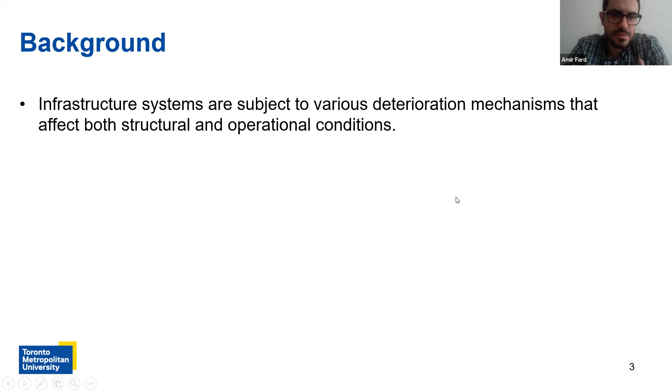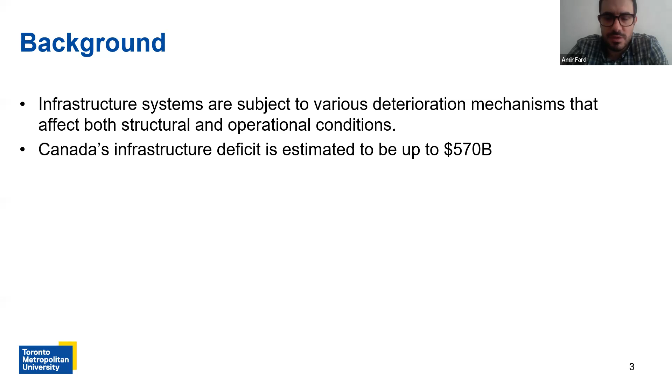Infrastructure systems are subject to various deterioration mechanisms that affect both structural and operational conditions. Canada's infrastructure deficit is estimated to be up to $570 billion. Based on the Canadian Infrastructure Report, the last version of which is 2019, 30% of water mains and sewers are in fair or worse condition, and the situation is also not good for roads and bridges: 40% of them are in fair or worse condition.

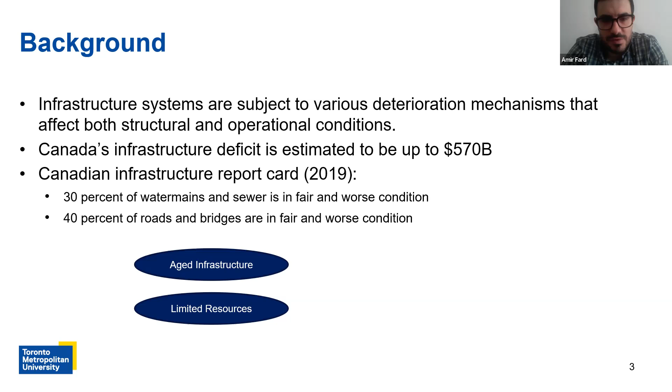So considering the situation of infrastructure and the limited resources to address the aging issue, we see that we need to optimize life cycle management policy to take better advantage of our resources.

The motivation of this study is the network sequential decision-making challenges. For sequential decision-making, especially for larger scale networks, the formulation and computation cost is one of the main challenges. For most cases, we cannot formulate the problem in a linear setting to take advantage of linear programming. And heuristic or evolutionary algorithms such as genetic algorithm cannot help much because they are case specific and they may also have convergence issues.

The motivation is one of our projects, to optimize the sewer network flushing program for a municipality in Ontario, Canada. On the right-hand side, you can see the sewer network. It consists of almost 2,000 sewer segments and 21 catchments. Each catchment consists of many sewer segments. Here you can see the sewer catchments, a catchment being a sewershed, in different colors, and each catchment consists of, on average, about 100 segments.

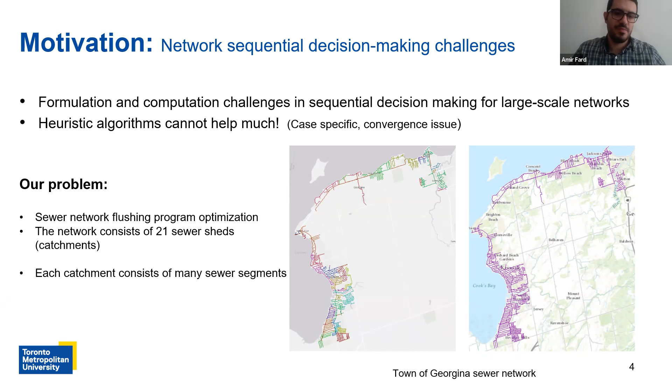So we can formulate our problem. Here you can see different years. Each year is a decision step. For example, for 7 years, we have 7 decision steps. And at each stage, we need to decide which catchments should be flushed that year.

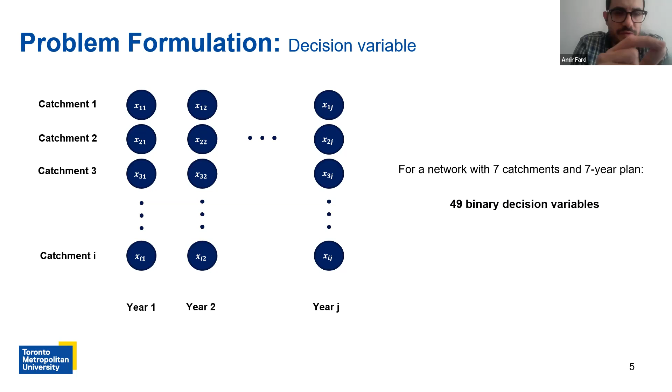In this study, I consider a toy example with 7 catchments and 7 years. It means we have 49 binary decision variables for this problem. Each xij is a binary decision variable: 0 means we do not flush that catchment, and 1 means we flush that catchment for that specific year.

We model the problem as a Markov decision process. The condition of each sewer segment is defined as a 5-scale rating based on NASSCO PACP rating, where 5 is the worst condition that needs replacement, and 1 is the excellent condition. So the deterioration mechanism can be modeled as a Markov process.

On the left-hand side, you can see the transition matrix for natural deterioration, and M is the maintenance effectiveness matrix. For example, you can see for the first catchment the transition probability matrix that represents natural deterioration. Here we consider perfect maintenance, which means whatever the state of the catchment, after flushing it goes to the excellent state.

This assumption won't affect the performance of the algorithm, because it's just a transition matrix. We can consider any maintenance effectiveness matrix, but because of a lack of data, we consider perfect maintenance here.

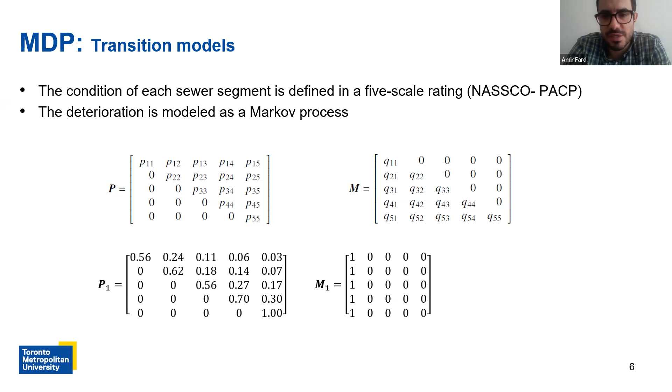The goal of this optimization is to minimize the overall average condition of the sewer network for the whole planning horizon. It means we need to minimize the performance of each catchment. Actually, it is a weighted average, and the weights are the length of the catchments over the 7 years. Li is the length of the catchment, H is the planning horizon, N is the number of catchments, and mu ij is the overall condition of catchment i at the end of year j.

Here you can see the mu ij, which is the performance or the overall condition, is the expectation of a state vector of the catchment after action i for catchment i at year j when we apply the action. So we can define the state vector based on the action and also the state vector from the previous year. As you can see, the overall condition for each catchment at a specific year is a function of transition matrices and also the decisions made in the previous years.

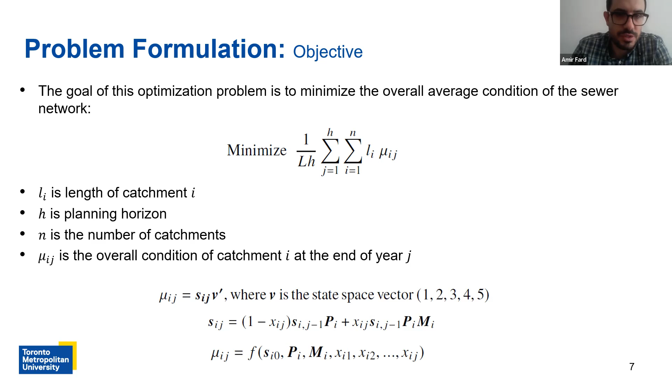The next constraint is that all catchments must be flushed at least once in this program to make sure that the whole network will be covered during this program.

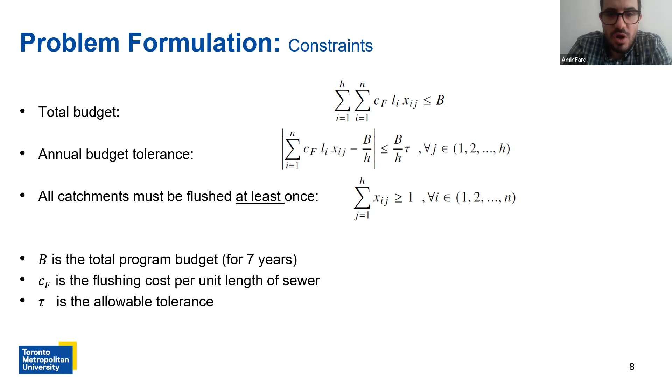Since our problem is a Markov decision process, I consider using a reinforcement learning approach to solve this MDP. In a reinforcement learning setting, we have an agent that makes actions in the environment. And after each action or decision, the environment transitions the agent to the next state and also gives the agent a reward as a function of the state and the action which has been taken.

In a reinforcement learning setting, the goal is to maximize the total cumulative discounted reward, or the negative of cost, which is equivalent to minimizing the cumulative cost. Here, gamma is the discount factor and R is the reward of each action in a specific state. And here, GT is the total cumulative reward during this program.

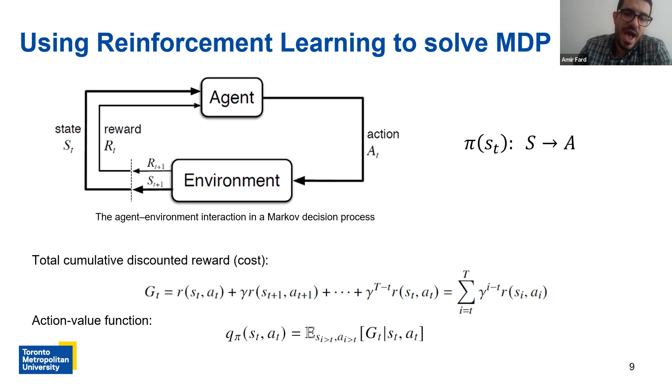There is an important concept here, which is the action value function. The action value function means how good it is to take a specific action at in a given state. It is the expectation of future reward after taking a specific action in a specific state.

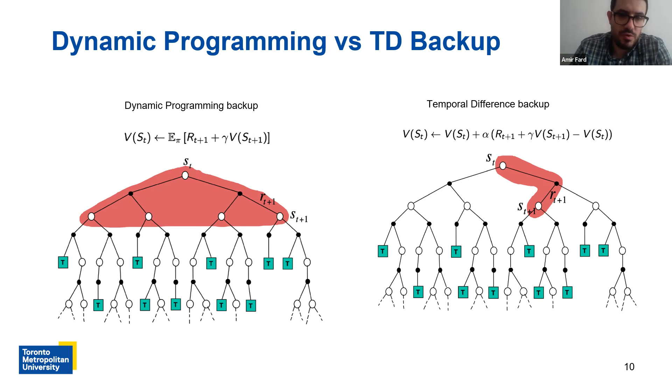The foundation of reinforcement learning is dynamic programming. However, in dynamic programming, if we want to estimate the value of a state, we need to take the expectation over all possible future states for the next stage. But many reinforcement learning algorithms use temporal difference backup. It means you make estimations gradually by interacting with the environment, just one step forward: after making a decision, you see the next state and the reward, and based on that reward, you gradually learn the value function of the states or the action value function of the policy.

Here I use a Q-learning algorithm. In the Q-learning algorithm, first we initialize all the Q values, and then we start interacting with the environment within a specific number of training episodes. For example, here I use 50,000 training episodes, and each episode is a simulation from the first year to the last year.

We consider epsilon greedy policy; I'll explain it later. And when we interact in the environment, for a specific state, we take action based on the policy, and then we see what is the reward and what is the next state. And based on that, we update our estimation about the Q values for that specific state and action.

And here, epsilon greedy means at each stage, with epsilon probability, we take random action, and with 1 minus epsilon, we use our previously learned policy. Actually, this is because here we have an exploration-exploitation dilemma. To address this, we use epsilon greedy policy, and as we go through the learning, we decrease the epsilon. It means gradually we take advantage more of the learned policy to reinforce it.

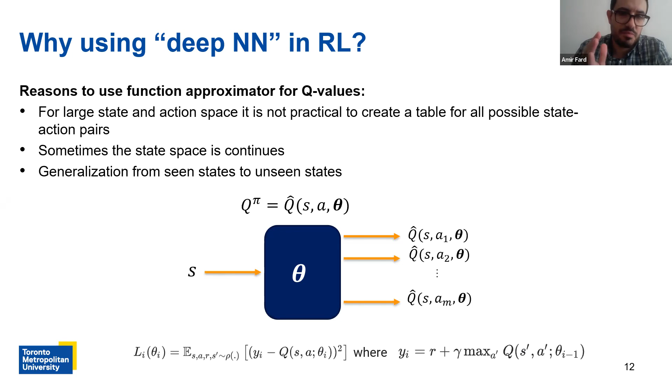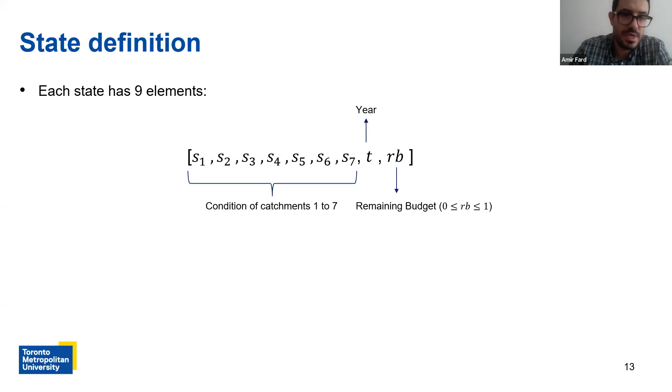For this problem, the state vector is defined as 9 elements. The first 7 elements are the conditions of the catchments, real values from 1 to 5. The 8th element is the year, and the last one is the remaining budget, which is the proportion of budget from 0 to 1. The reward is defined as 5 minus the overall condition of the network after applying the action based on the transition matrices. And also I added a negative value to the last step reward if the total cost exceeds the total budget.

And we can deal with the annual budget in 2 ways. As a naive assumption, if the annual budget is out of the specified tolerance, we can add a penalty to the rewards. The next option is we reduce the action space, because for this example, we have 7 catchments. It means 2 to the power of 7, we have 128 actions in the action space, but based on the annual budget tolerance, 14 of them are feasible actions that won't violate the annual budget constraint.

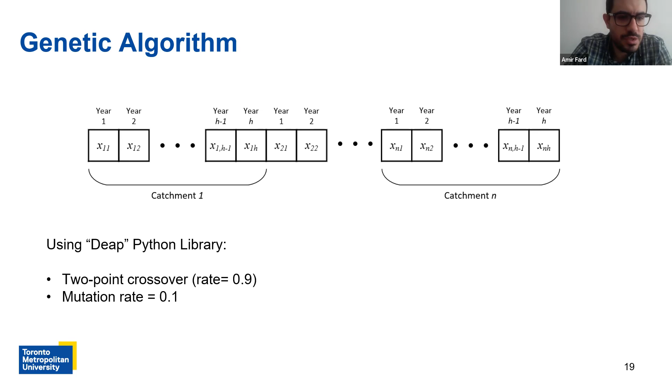And the worst one is for multi-agent deep reinforcement learning, because there is a challenge to define how the agents cooperate together to reach the solution. It needs hyperparameter adjustments. It needs more work to reach a good solution.

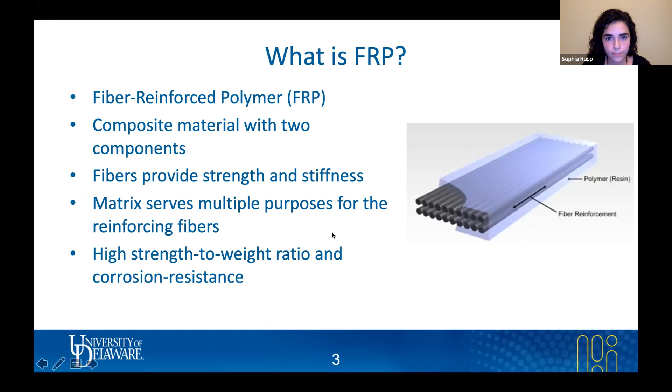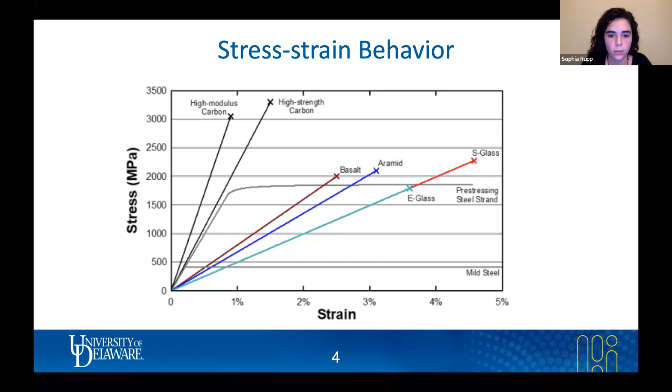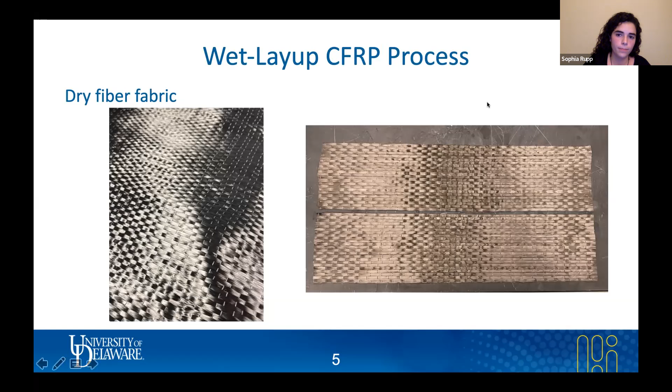There are a few different methods that can be used to fabricate CFRP. The method that I'm specifically using in my research is known as wet layup, or to put it in simpler terms, it's just fabricating the CFRP using your hands. And the way you start this process to strengthen a concrete member is to first cut your dry fibers out, depending on how much you need. And then you can mix your neat epoxy and your putty epoxy. Neat epoxy consists of two components, a part A and a part B that need to be proportioned and then mixed together. And then putty epoxy, also known as thickened epoxy, consists of the neat epoxy mixed with silica fume.

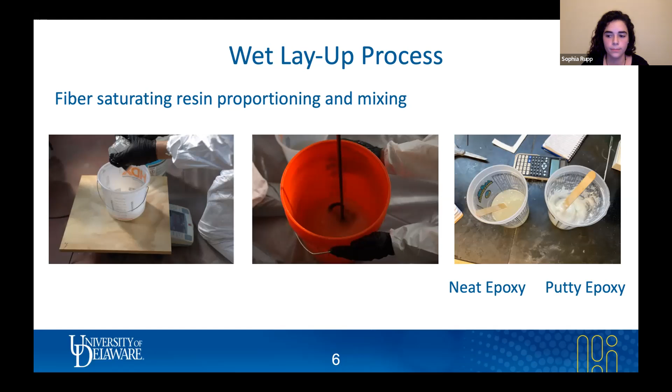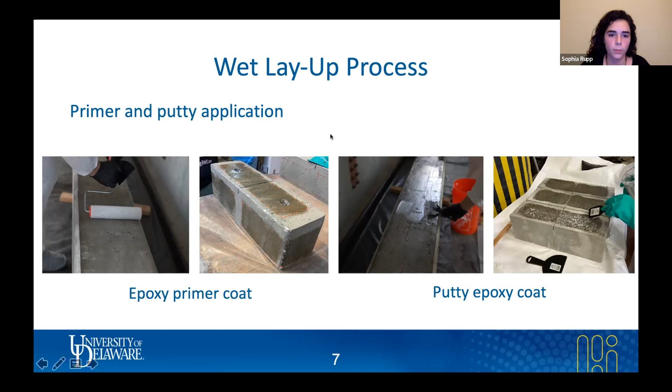After you have those components mixed, you can then prepare your surface for applying the CFRP. This consists of applying an initial epoxy primer coat onto the surface. And then on top of that, you apply that thickened epoxy or putty epoxy. What this does is it fills the voids and the pores in the concrete to ensure a good bond between the CFRP and the concrete. And then comes the actual saturation of the fibers to make it a composite material and apply to the concrete surface. This is typically done with a wet layup process of just pouring the mixed epoxy onto the dry fibers and using a tool to make sure that the epoxy has fully saturated each and every fiber.

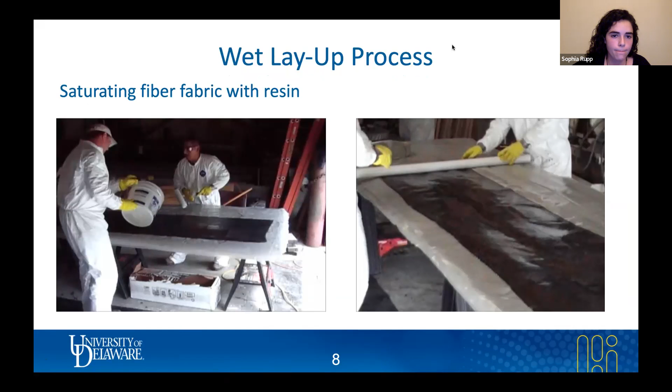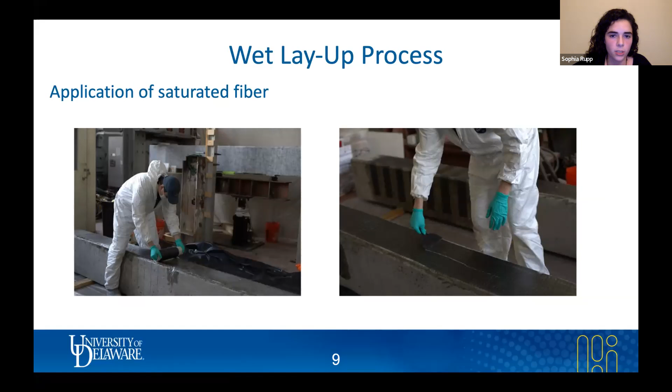Next is to then take your saturated fibers and apply it to your concrete surface, and typically take a putty knife, drag it over the saturated fibers to make sure that there's no air trapped underneath the saturated fibers or in between the concrete surface and the fibers. And then you let this sit and cure for about 72 hours, and the saturated fibers will then cure and become a composite material, leaving you with a strengthened member.

Despite all of the great properties of CFRP that I previously mentioned, there has been prior research done that has shown when CFRP is exposed to water in the field, it will lose adhesion between the CFRP and the concrete. When a strengthened member is subject to flexure and it's dry, we typically will observe a cohesive debonding failure, which indicates that there is good bonding between the CFRP and concrete. However, when it's wet, we will experience an adhesive debonding failure, which indicates that there's poor bonding between the CFRP and concrete, and the CFRP essentially peels away from the concrete.

Debonding is a very typical failure mode that we see when a strengthened beam is subject to flexure, and it's very undesirable because it happens way before the CFRP can reach full potential and full use out of its properties. So the fact that water exposure can induce this failure mode makes it very important to research ways to improve the bond durability between CFRP and concrete after it's been exposed to water.

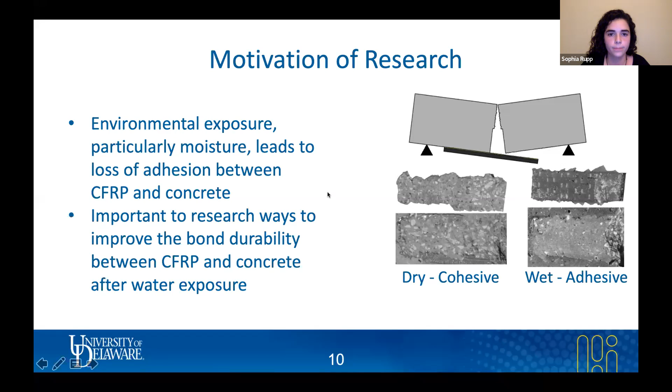And for that reason, I am specifically researching how carbon fiber splay anchors can be used to improve the CFRP and concrete bond after it's been exposed to water. And not only will I be researching the effects of water exposure on a concrete strengthened beam, but also the individual constituents that are strengthening the beam, such as the CFRP alone, the putty epoxy that I mentioned, and the neat epoxy that I mentioned earlier.

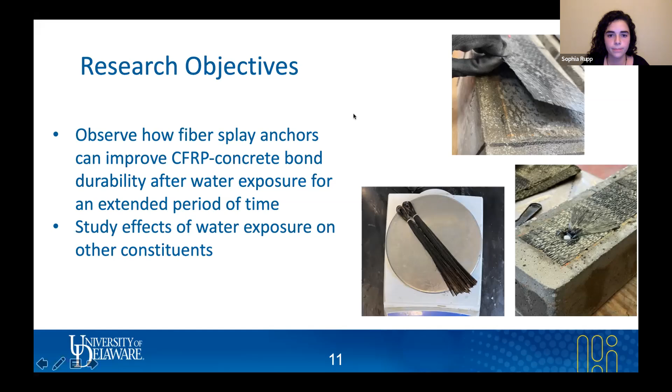ACI 440.9R provides accelerated conditioning protocols, or ACP for short, that provide guidelines on how you can replicate long-term water exposure to a concrete strengthened beam. And the two main guidelines to take away from this are that the concrete strengthened beams need to be exposed in water for 3,000 hours, and the water that they're immersed in has to be around a temperature of 122 degrees Fahrenheit.

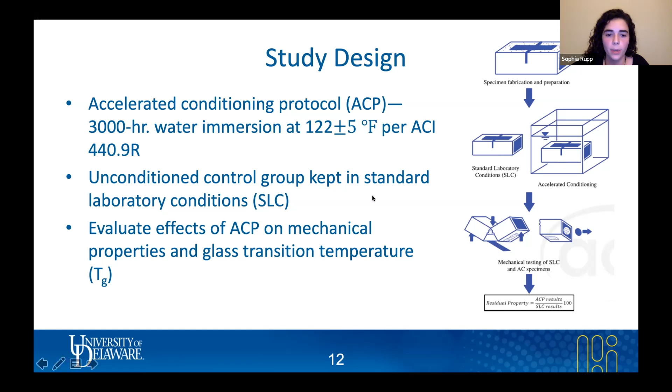And in order to study the strength retention of these beams that have been exposed to water, we also have to have a duplicated group that is unconditioned, or is kept in standard laboratory conditions, or SLC for short. And not only will we be immersing the concrete strengthened beams in the water, but we will also be immersing the constituents that make up the strengthened beam to evaluate the effects of ACP on those materials as well.

We will be measuring the strength of both the SLC and the ACP groups by doing a 3-point bending test. The beams that I casted so far are 6 inches high by 6 inches wide by 20 inches long. And when they are applied to the 3-point bending test, they will have a clear span of 18 inches. There will be a point load applied on the compression face of the beam at midspan. And on top of this, there's also a notch introduced at the tension face at the center line, so that we can control crack initiation.

From this test, we will be able to collect information about load versus deflection. And on top of that, we will be able to collect strain data from the CFRP. The strain gauge will be applied on the CFRP sheet, and it will be applied over that crack that's introduced.

There will also be dynamic mechanical analysis tests completed, or DMA for short, in which we will apply a cyclic load to the sample that's being tested, which in this case will be the neat epoxy and the putty epoxy. The cyclic load is applied as the temperature is increased, so that we can characterize the glass transition temperature of the samples, or Tg for short. The glass transition temperature is a characterization of when the sample goes from a glass-like state to a plastic or rubbery state. And the reason that this is important information to have is so that we know the upper service limit temperature of the material.

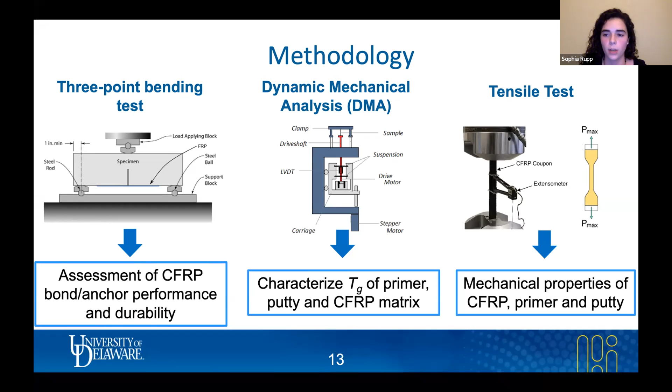And then lastly, we will also be conducting tensile tests on the CFRP samples, as well as the putty epoxy and the neat epoxy, to gain information about those mechanical properties. There are a few different variables that I'll be looking at changing and varying throughout my test specimens. The first is the anchor diameter that we're using for strengthening.

We are looking at using a 1/4 inch, a 3/8 of an inch, and a 1/2 inch diameter anchor. On top of this, we will also be varying whether the CFRP is bonded to the beam or if it's unbonded to the beam. To give a little bit of a better description on that, a bonded beam will include direct bond between the CFRP and concrete, whereas the unbonded beam will have what is referred to as a bond breaker between the CFRP and the concrete. In my case, I'm using a very thin layer of Teflon tape,

and this is so that we can study the anchor capacity alone. And then the last variable that we're looking at is whether or not we include that layer of putty over top of that initial epoxy coat. The reason for that is to see just how effective the use of that putty is in increasing the bond durability or increasing the bond between CFRP and concrete.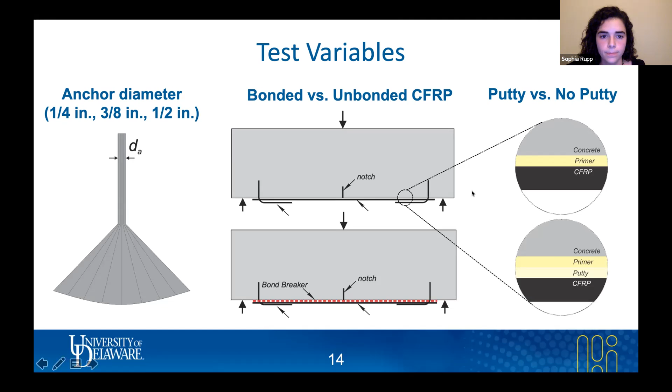Before I could actually get into the strengthening of the concrete beams, there were a few steps that I had to take in order to prepare the beam for strengthening. As you can imagine, for the beams that had anchors installed, I had to drill holes into the beams. And not only that, but I also had to chamfer those holes to avoid stress concentrations when the fiber splay anchor was bent over that corner. And for the same purposes, I also had to chamfer the corners of the beams.

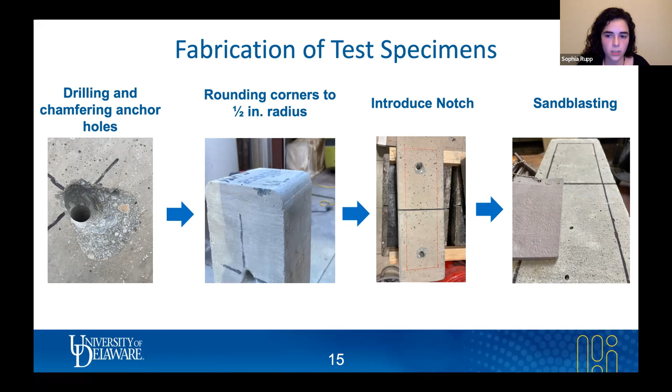The reason for that is because we also apply what is known as shear wraps around the sides, and that's just to ensure that the beam will fail in flexure rather than shear. As I mentioned, we introduced that notch in the center line. And then finally, you sandblast the surface of the beam to give it a surface roughness so that there's good bond between the CFRP that's being applied and the concrete. And then comes the actual strengthening process.

So I briefly touched on the first two steps here, but I'll summarize them again. In order to strengthen the beam, you first start with an initial neat epoxy primer coat, and then you apply that layer of putty epoxy on top, so long as you are strengthening a beam that includes that putty layer. If you are strengthening a beam where you skip that putty layer, you would then move on to the third step. And additionally, if you're strengthening an unbonded beam, you would skip those first two steps

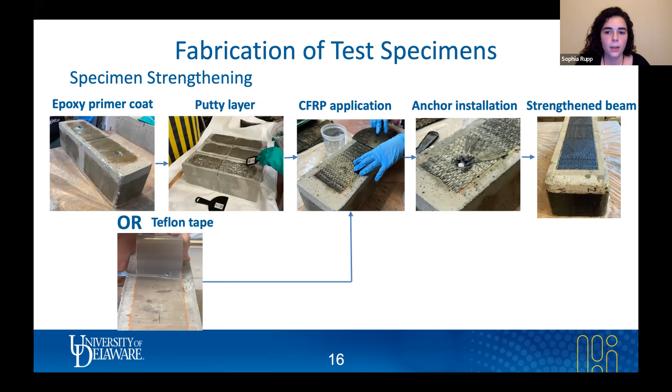and move on to just applying that Teflon tape, and then go ahead onto the third step, which is saturating your carbon fiber, applying it to the concrete surface, and then embedding your anchor into the anchor hole, splaying it out over the CFRP that was applied. And then finally, you add those shear wraps around the sides, and additionally a square patch over the anchor and the anchor hole to give it more of a finished look.

This is the accelerated conditioning setup that my lab manager and I came up with so that we can follow the guidelines specified by ACI. It consists of a very large cooler that, as of right now, has all 33 of my ACC beams immersed inside it. There is an inlet and outlet that is connected to a circulation heater and a pump. This keeps the water consistently circulating in and out of the tank and through the circulation heater to keep it at that specified temperature that ACI requires.

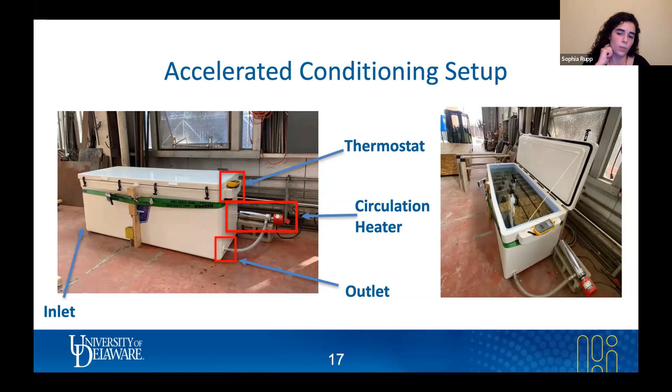These beams are scheduled to begin testing on January 4th, and I'll wrap up testing of those beams by February 6th. Now, considering that those beams have a while before they can be tested, they're in the process of being conditioned. And additionally, I'm in the process right now of preparing my SLC group of beams for strengthening.

I had the chance to work with an undergrad student, Nico Zawadny, and run some preliminary tests on a few SLC beams. The SLC beams consisted of an unstrengthened group, a strengthened group with no anchors, and a strengthened group with anchors, varying those anchor diameters that I mentioned earlier, as well as an unbonded beam with 1/2-inch anchors.

As you could imagine, from 3-point bending of the unstrengthened beam, we saw a relatively low load capacity. The tensile cracks started to form pretty early on, and then the beam failed. However, for the strengthened beam that had no anchors, we saw a slight increase in load capacity.

And once that initiation of debonding starts to happen, you see a slight increase in stiffness and a slight increase in load. However, the progression of debonding will continue, and those tensile cracks in the concrete will start to form once it really starts to debond, and that will lead to failure eventually.

And then for the beam that was strengthened with fiber anchors, you do see that initiation of debonding around the same load as you do for the beam without anchors. However, after that initiation of debonding starts to happen, you see a very significant increase in stiffness in the member, as well as increase in the load.

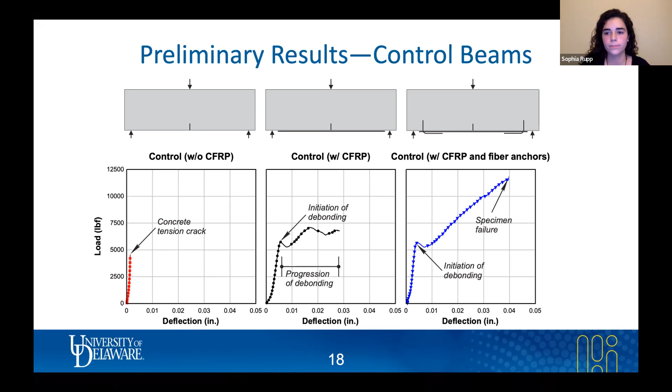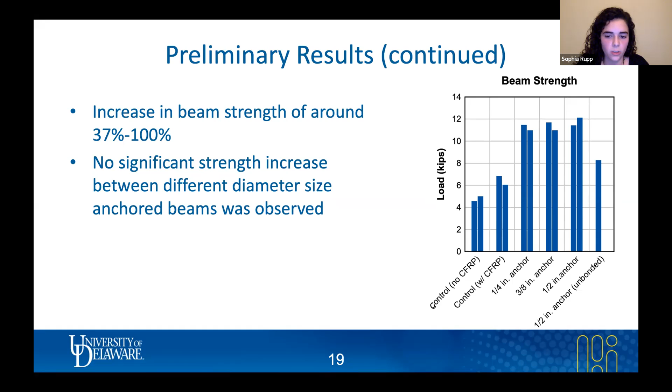This is a little bit of a better representation of all the beams that we tested and the strength that was reported for those beams. We found that there was around a 37% to 100% increase between the anchored beam and the unanchored beam. And one thing that's very interesting to point out here is that we didn't see really any significant differences in beam strength for the differing anchor sizes. That's not something we expected to happen, and it will be interesting to see if that still holds true for the accelerated condition beams.

That doesn't logically make sense, but we kind of assumed as of right now that that is due to an issue with the strain gauge application. And that's just something that's going to have to be taken into consideration when I get around to actually testing my experimental beams.

So I just touched on this, but I would like to still summarize the main findings that we found so far from my SLC beams that were tested in preliminary testing. As I mentioned, we found that the fiber anchors increased the beam strength from about 37% to 100%. The strain utilization increased from about 500% to 700% between the anchored and unanchored beams. And then finally, what was really interesting to see was that the fiber anchor diameter size really did not have any significant effect on the overall beam strength.

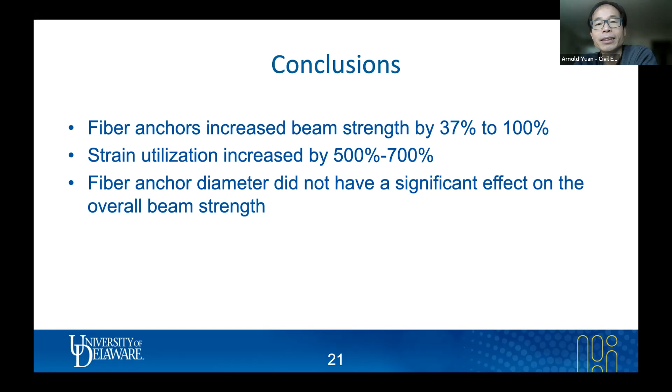If I may, a question, Arnold here. Sophia, thank you for sharing these interesting experimental results. So talking about this strain utilization increase, I guess that will be great news for FRP beams, because that means that the ductility of this beam will be hugely increased. Would you agree? I'm sorry, can you repeat that again? Well, I'm just trying to interpret your results from a component ductility point of view, because when the ultimate strain of the FRP bar increased so much, then that means the overall ductility of the beam will be increased. Would you agree with that?

Yes, I'd say that. And then also another takeaway from that is, as the strain increases, it's also indicating that you're getting more use out of the material itself. And that's one of the great things about the anchors, is that compared to an unanchored beam, you get a higher increase in the strain and you get more use out of the properties of the material. So not only the increase in ductility, but also more use out of the material.

All right. Yeah, maybe another question, maybe you already mentioned it during your presentation, but I probably missed it.

What is the primary purpose of the accelerated conditioning component of your experiments? Are you trying to look at the overall residual life, or what is the purpose of that accelerated conditioning? The point is for bond retention. So we can research the bond retention of the accelerated conditioned beam in comparison to the standard lab beam by just taking the average strength of the conditioned beam and dividing it by the average strength of those.

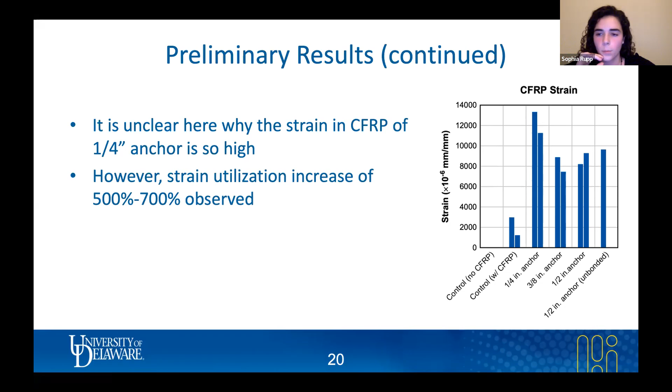And just to point out, there are also many other types of accelerated conditioning that can be tested. It's not just moisture exposure that can affect the bond. There are also tests such as UV radiation exposure, de-icing salt exposure, diesel fume exposure. There are so many things that can affect the bond of CFRP, but we are specifically focusing on moisture exposure.